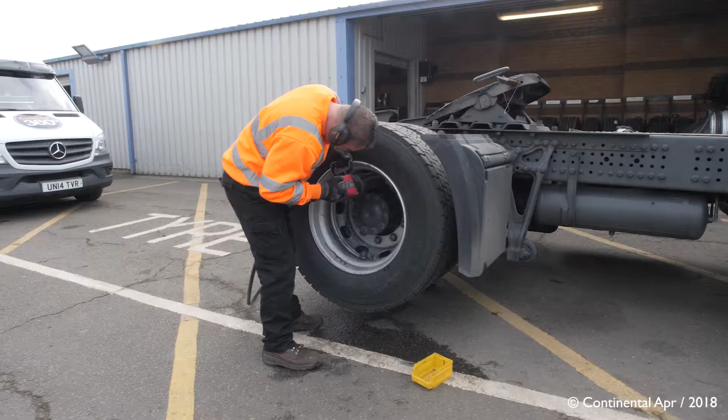What's more, if your vehicle does suffer from a detached wheel, your operator's licence could be at serious risk. That's why you need to stay on top of wheel fixing procedures and get it right each time, every time. During the course of this training video, we'll be showing you how to safely remove, service and remount a wheel on a truck, trailer, coach or bus.

And remember, if at any time during this training video there's something you don't understand, stop and ask your supervisor for further explanation, because you cannot have learning without understanding.

It's important to ensure that when a vehicle is booked in for a wheel removal, that everyone knows the correct procedures. That means parking it in a safe environment and above all else ensuring there's clear signage showing it's not to be taken out onto the road under any circumstance. It also means informing your site personnel in the traffic office and via the driver's notice board that the truck is not in service. When mounting or removing the wheel, be sure you follow all the standard working practices.

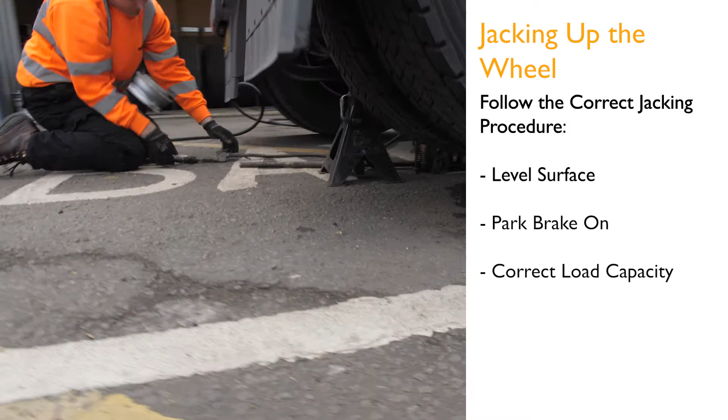For example, the initial lifting of the vehicle must be carried out using the correct jacking procedures. That means ensuring it's on a level hard standing surface with the park brake on and using a suitable jack with the correct load capacity. And if you've never removed or remounted a commercial vehicle wheel before, you must be properly trained to do it by a qualified tyre technician before starting the work.

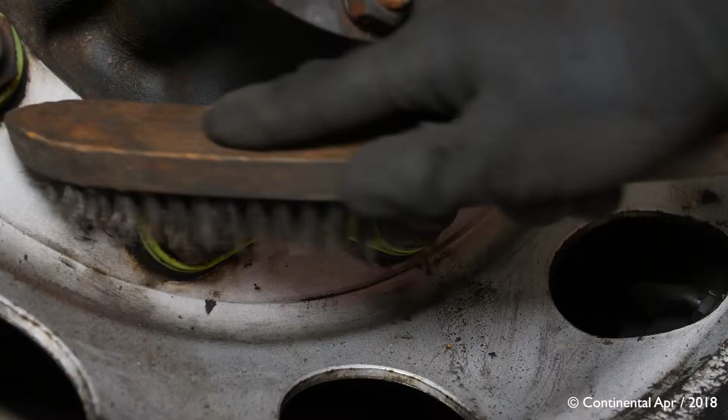First of all, before unbolting the wheel, make sure you clean the exposed threads of the studs with a wire brush or lightly lubricate them. Next, visually inspect the wheel assembly and check for any evidence that it may have been operating in a loose condition. If there are signs that a tyre has substantially deflated or has stood in a deflated condition for some time, the tyre or wheel components might have become damaged or displaced.

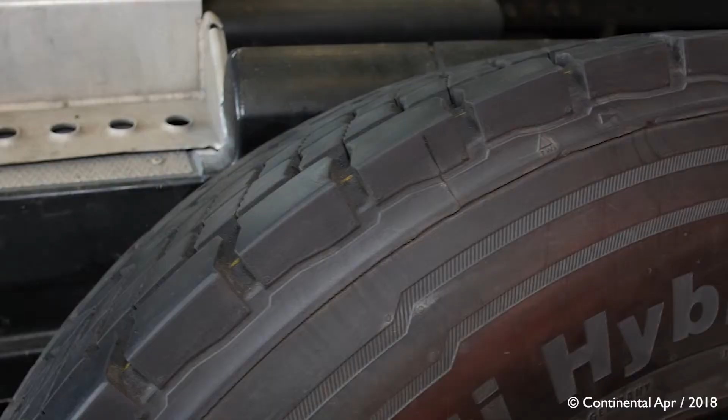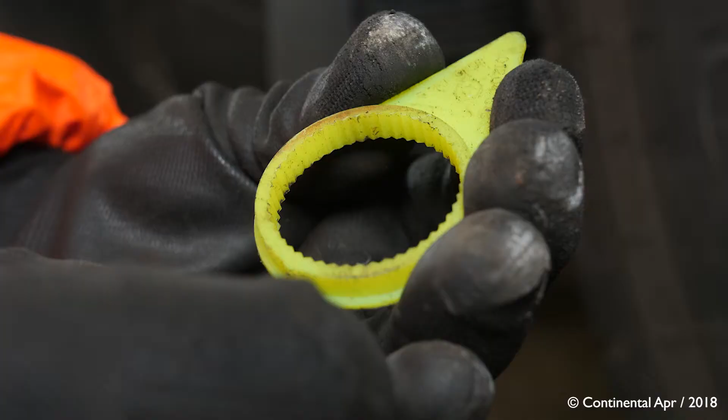If that's the case, remove the wheel assembly from the vehicle and the tyre from the wheel. Obviously, you'll need to examine the tyre to see why it's deflated and whether it's suitable for further service. And remember, each component part of the wheel must also be examined and replaced as necessary before being reassembled.

Now, in the case of aluminium alloy wheels, excessive heat from either a fire or a brake malfunction or a wheel bearing failure or a tyre failure or indeed any other cause could weaken the metal and render the wheel unserviceable. So if you do suspect an alloy wheel has been damaged by excessive heat, it must be removed from service immediately.

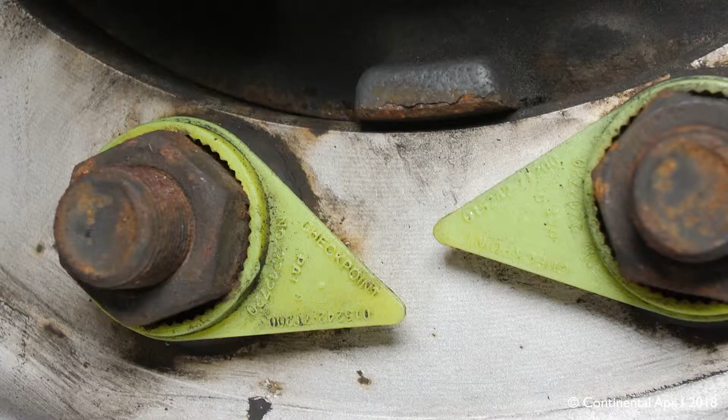Now it's time to make sure that any other loose debris around the wheel is removed, again using a wire brush. And if wheel nut indicators are fitted, check to make sure they're in the correct position. If they're pointing the wrong way, that could well be early signs of a potential defect, so you need to be vigilant for any abnormalities.

If the wheel is cracked or damaged, remember to deflate the tyre before attempting to remove the wheel. And should it be difficult to remove a wheel from the hub or drum, under no circumstances whatsoever, ever hit the wheel rim directly with a heavy hammer. To remove a wheel, you should always use the suitable tools designed for the job. And if those tools aren't available, a protective wooden block and a soft-faced mallet may be used, but only with caution.

Once the wheel has been lifted off the ground, unbolt the wheel nuts with the air gun, making sure to follow all standard working practices and keeping the wheel nuts in a safe and secure environment so you can inspect them later. If you do experience any excessive tightness or difficulty in removing the nuts, this could also indicate a potential wheel security issue.

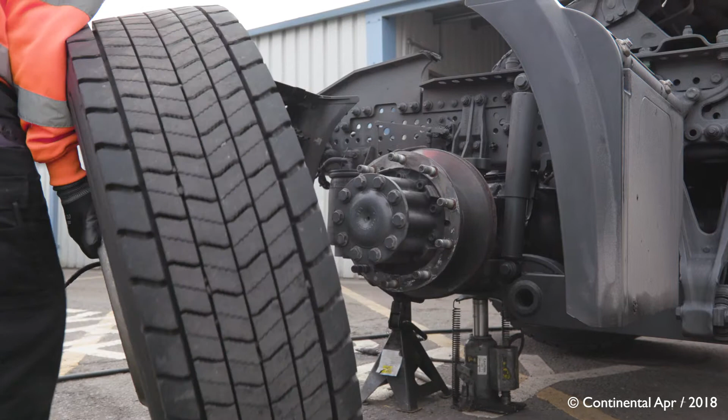Next, carefully remove the wheel from the hub assembly in line with manual handling procedures, taking extra care not to damage the stud threads on removing the wheel, whether it's a single or twin wheel assembly. So use levers or a cradle to lift and pull the wheels squarely off the hub. Finally, take the wheel away from the vehicle and fully deflate the tyre before carefully removing it from the wheel so it can be serviced and inspected.

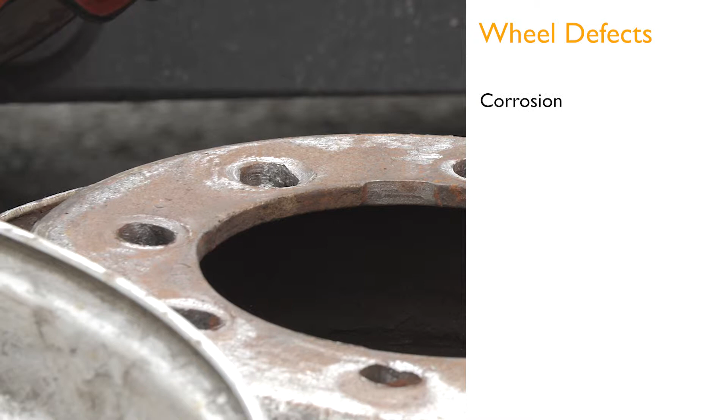Now that you've removed the wheel, you need to ensure it's safe and serviceable and that you've thoroughly checked it for any defects. And remember, any signs of damage or wheel deterioration, no matter how small, should be reported to the customer's maintenance supervisor. When inspecting the wheel, look for any signs of corrosion or pitting and remove any light rust with a wire brush.

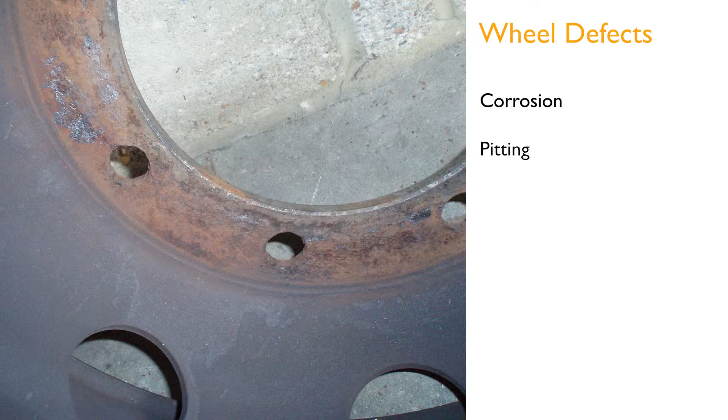If there's still any heavy pitting or corrosion after you've cleaned it, withdraw the wheel from service immediately and report it to the customer. Also, check for excessive wear around the centre bore of the wheel. Any significant wear in this area should also prompt the wheel's removal from service.

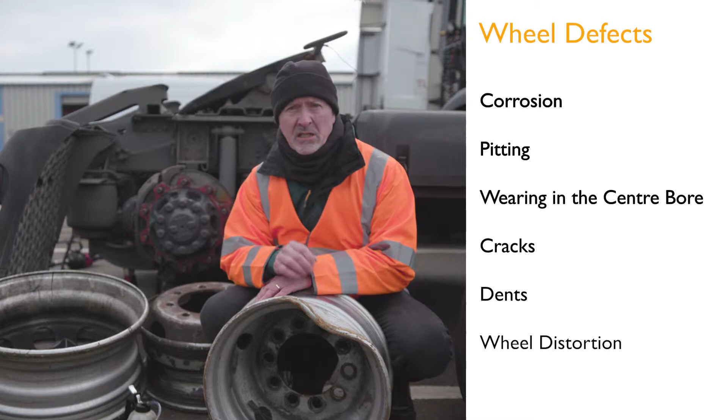And don't forget to closely inspect the wheel for any cracks or dents or wheel distortion too. And regardless of whether the damage is large or small, it won't be fit for further use in operation and the wheel should be taken out of service immediately. Once again, report this to the customer for further action.

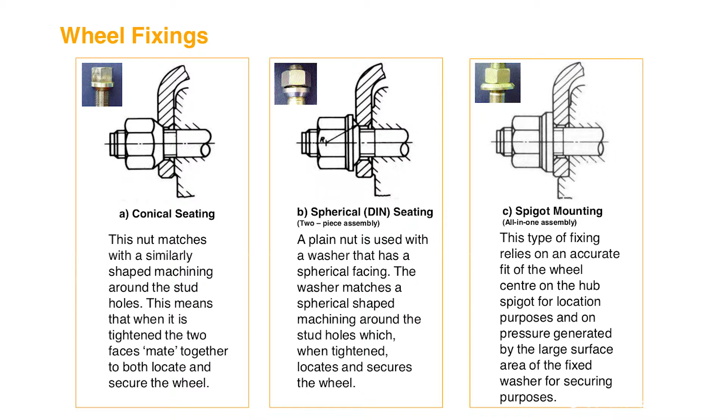However, if the wheel is undamaged and safe for operational use, a tyre can be refitted to it. But if you do find any defects, you must remove the wheel from service immediately and make sure it's not reused in any capacity whatsoever. Finally, remember that the replacement wheel should always be the same wheel fixing type as the original, and pay attention to any further customer specific policy that could be in place.

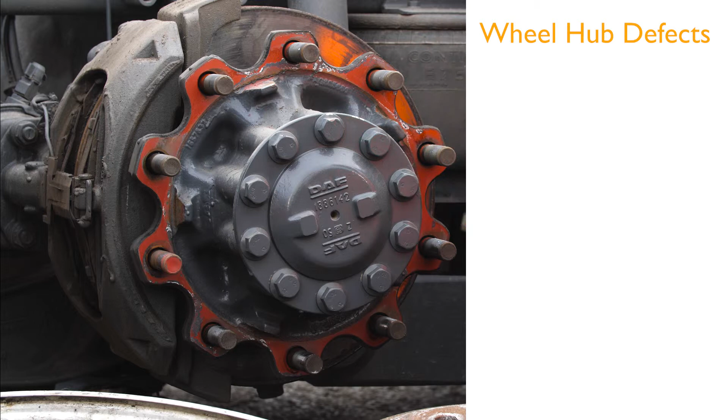Now that we know the wheel is operational, we can check the wheel hub. Firstly, inspect for any signs of worn spigots. This will be indicated by the wheel not centering correctly, which will cause an imbalance of the wheel, in turn vibration, resulting in loosening of the wheel itself. The spigots should also be free from debris, corrosion, or any damaging defects.

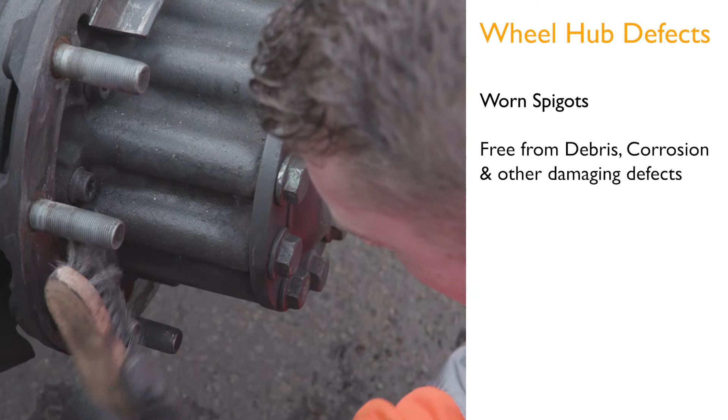Use a wire brush to remove the debris from all the areas of the wheel hub, but especially around the spigots and the mating faces, which should be spotlessly clean. If there is corrosion that can't be removed, or if there's any other damage, you must report it to the customer immediately and have the vehicle removed from service. If you're still not sure, contact the site, as it's better to have a vehicle parked up safely for further inspection than to have it involved in an avoidable accident out on the road.

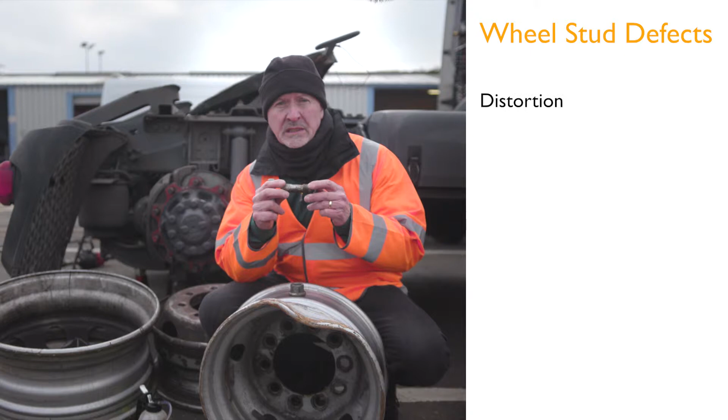You should now clean the wheel studs thoroughly and inspect them for any damage, for example, distortion, elongation, cracking or excessive wear to ensure they are reusable. And if they have been damaged, remove the vehicle from service and fit new wheel studs. Once again, make sure the customer knows that they're being replaced and that you've obtained a defect number.

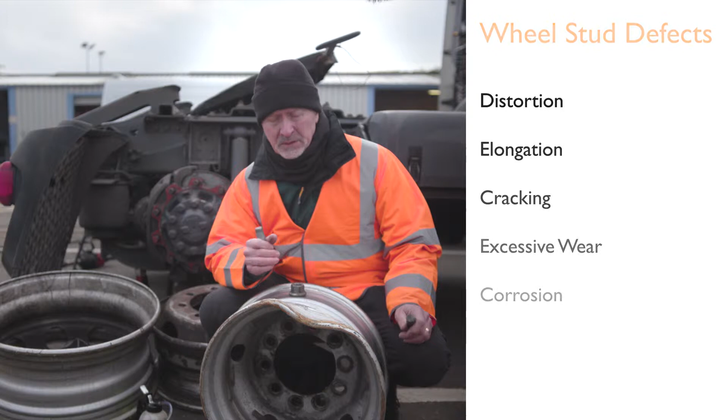Also, check the washer element of the nut. These need to be free moving and show no signs of cracks, corrosion or seizing. Also check the nut itself to ensure it's free from debris around the threads and that there are no signs of any damage. Remember, it's important that the nut should be able to move freely over the entire length of the stud when tightening by hand. And if you do need to replace the wheel nut, only use those that meet the original material specification.

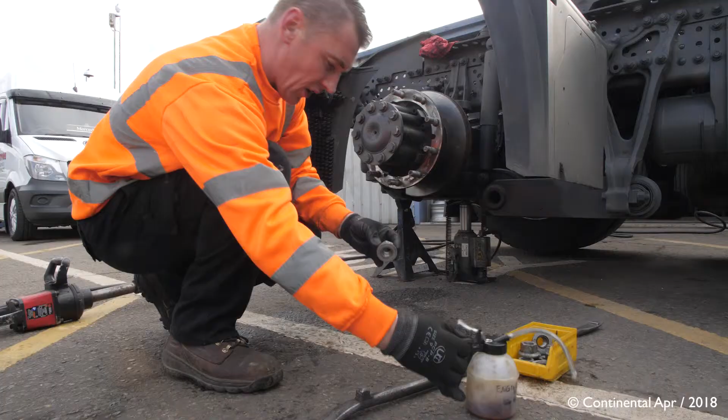If you find any of these defects on a wheel or its component parts, you must contact the fleet manager. More importantly, if you're ever unsure about a wheel's condition, contact a fleet manager, because it's better to act on a problem now than leave it to develop into something more serious later. Finally, if all the component parts have either been correctly serviced or replaced, you can now begin remounting the wheel back onto the hub.

Remember, before remounting the wheel assembly, ensure all the areas around the wheel and hub are thoroughly cleaned to ensure the mating faces on the wheel nave and the wheel hub are free from debris, as dirt or rust could end up between the mating surfaces and prevent sufficient clamping forces when the wheel nuts are tightened. Also, we need to make sure that the threads on the studs can reconnect.

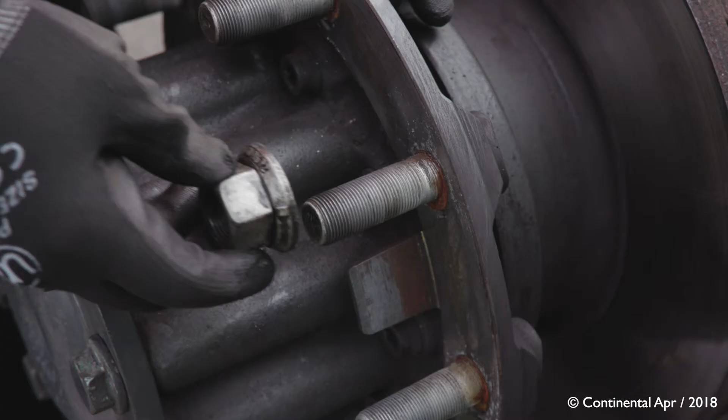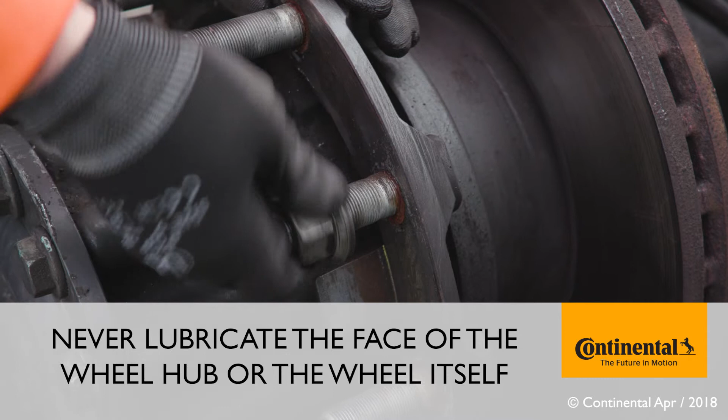To check this, apply a recommended amount of lubricant to the end of the threads on the studs and nuts, unless otherwise instructed by the vehicle manufacturer, whilst making sure you don't lubricate the face of the hub or the wheel. In other words, lubrication should only be applied to the nuts and the studs. Once again, if any components are found to be damaged or unserviceable, replace them accordingly and obtain a defect number.

Now, carefully refit the wheel to the hub, taking care not to damage the wheel studs and threads, and making sure the valve access is aligned if twin wheels are fitted. Make sure also that you follow all standard working practices when doing this.

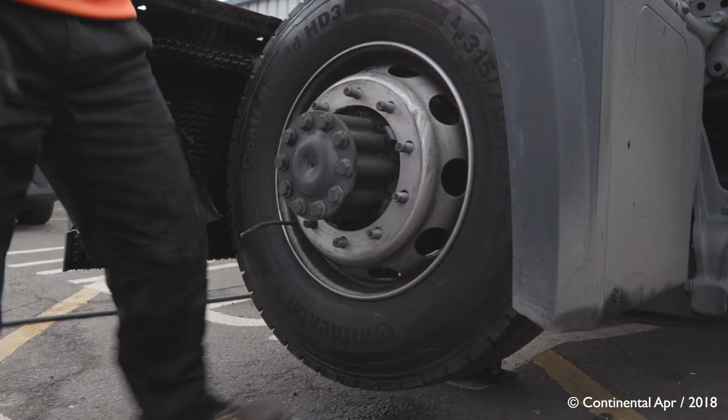Refit the wheel nuts manually over the full length of the stud, and if any excessive tightness is encountered during this process, then the stud and nut must be considered unserviceable and they should be replaced. And if an air tool is used, it's advisory to have it at the lowest setting. Above all else, never use an air tool for the final tightening.

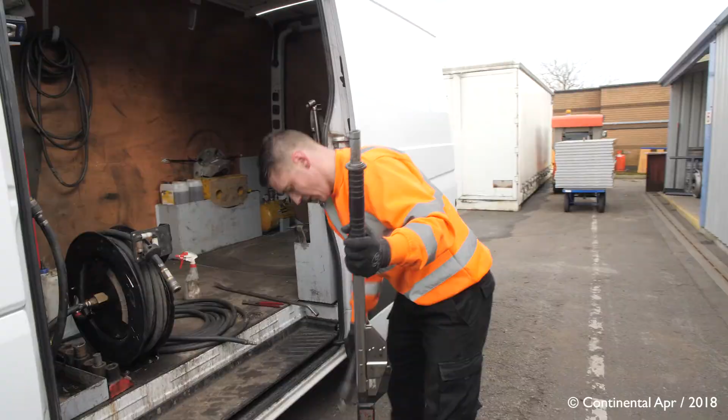Once the wheel assembly has been remounted on the hub and ensuring there's no damage to the studs, either hand turn the nuts onto the studs or use an appropriate wheel brace. And once the wheel assembly is secured on the hub, torque the nuts using a properly calibrated torque wrench, tightening the wheel nuts in the correct sequence. This tightening should occur before you lower the vehicle back to the ground. And remember, never be tempted to over-tighten as this will stretch the stud.

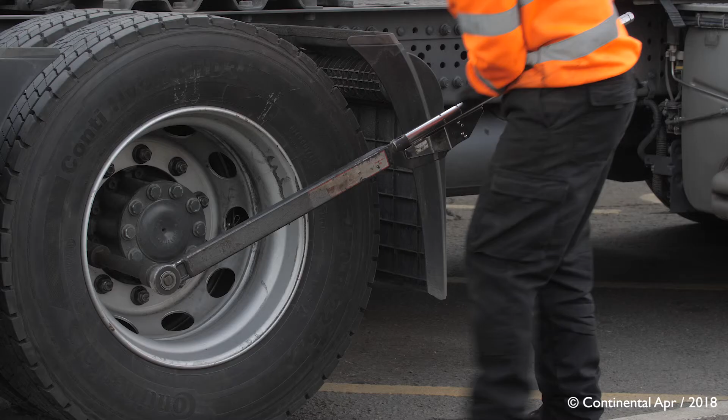On HGVs, after the initial wheel tightening has been completed, it's possible there could be what's called settlement in the studs. That's a relaxation of the clamping forces on the wheel. Therefore, it's vital that you repeat the torquing procedure after leaving the vehicle to stand for at least 30 minutes or after it's travelled for a distance of between 40 to 80 kilometres, 25 to 50 miles.

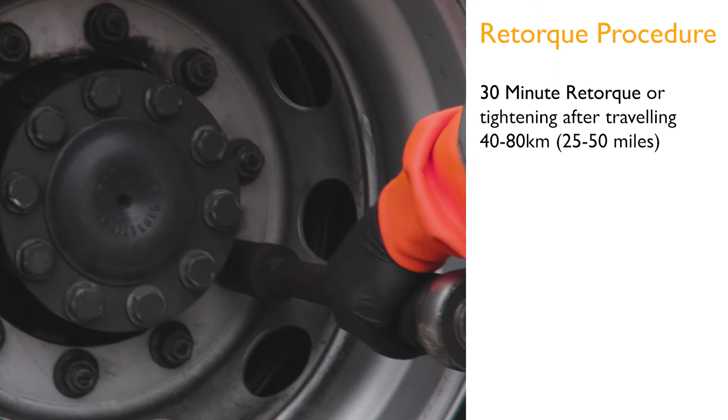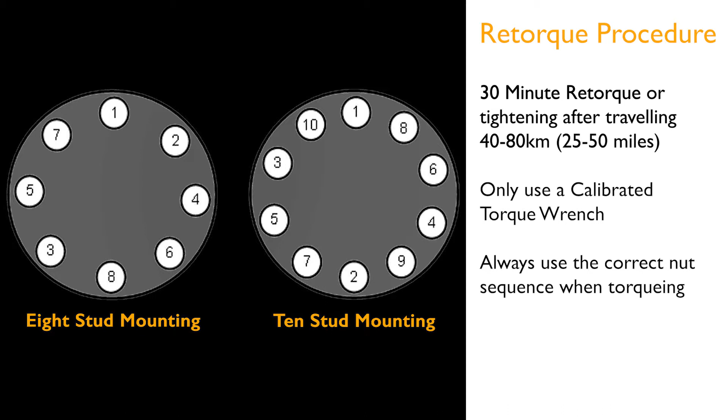Again, only use your calibrated torque wrench and not extensions or wheel nut spanners and spiders. And again, the correct nut sequence must also be applied. But above all else, under no circumstances whatsoever should wheel nuts be slackened off and then retightened during the retorque process. Finally, after retorquing has been completed, refit the wheel nut indicators if required, making sure they point to the correct position.

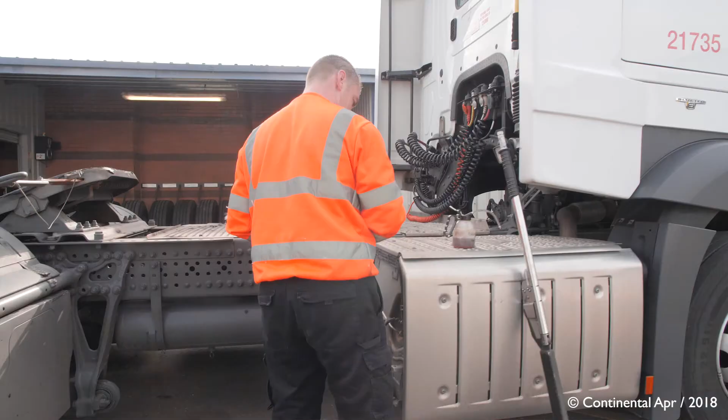Then it's time to return all your equipment to storage, reduce the torque wrench setting to 0, and finally, remove any working signage, complete the appropriate paperwork, and make sure that appropriate copies are given to the relevant parties. The truck is now operational once more and it's safe to go back on the road. But always remember, routine in-service checks should take place afterwards and all wheel fixings rechecked for tightness in accordance with the operator's and the vehicle manufacturer's preventive maintenance schedule.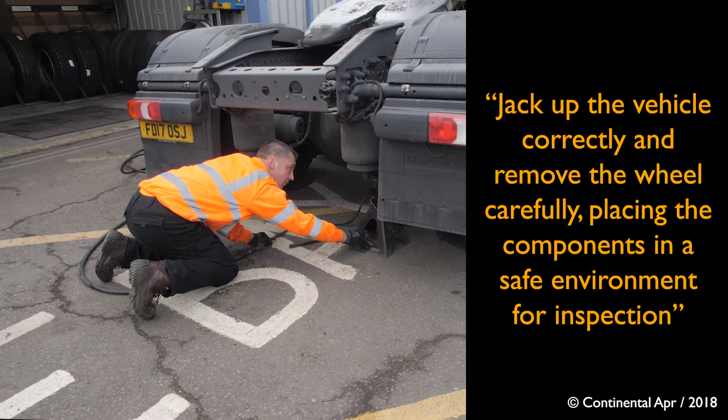So there you have it, the complete process of removing, inspecting, servicing and refitting a wheel. And now you have the knowledge to make sure the vehicles you service are not only safe for those driving them, but also for those sharing the road with them. And to finish, here are some of the key points to remember. Jack up the vehicle correctly and carefully, and remove the wheel from the wheel hub, placing all the nuts and studs in a safe environment so you can inspect them later.

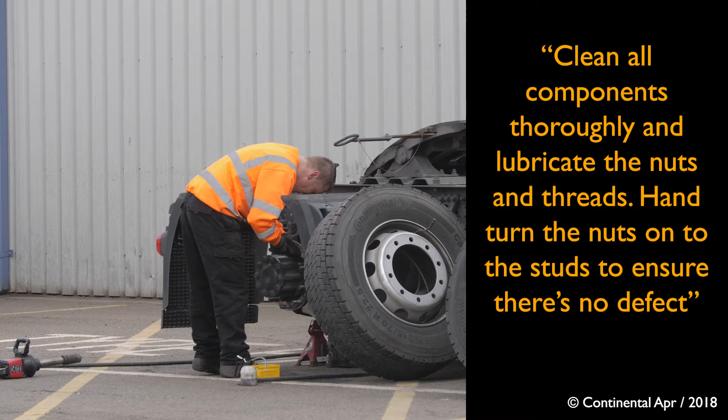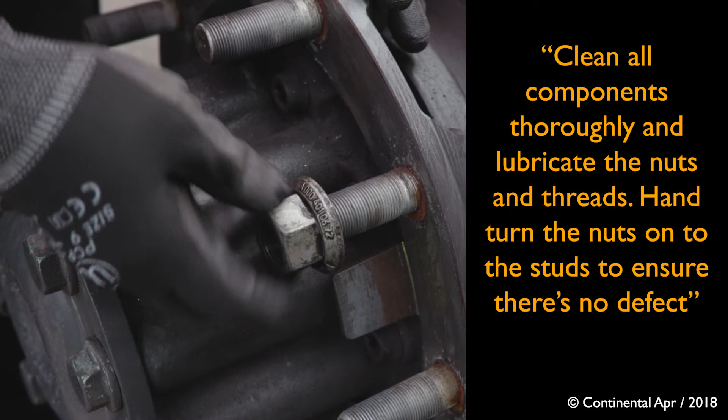Remove the tyre from the wheel, making sure to follow all standard working practices and check for any defects, corrosion, cracks, dents or anything else you find of concern. And if you do find any defect, take the wheel out of service immediately. Clean all the parts thoroughly to remove any loose debris and lubricate the nuts and threads. Make sure the wheel nuts are usable by twisting them onto the wheel fixture by hand until you see the top of the head. However, make sure you check your customer's policy as it may vary. Make sure you don't lubricate the wheel hub face or any other parts of the wheel.

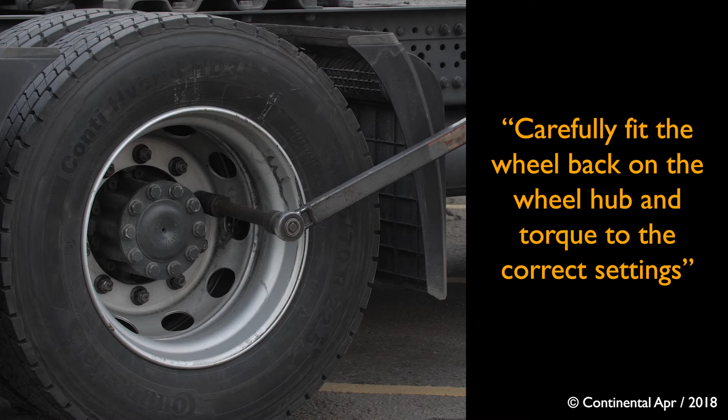Fit the wheel back onto the wheel hub, carefully following all standard working practices, and torque the wheel nuts to the correct setting. Then, lower the vehicle and let it stand for at least 30 minutes, or after it's travelled a distance between 40 and 80 kilometres, 25 to 50 miles, before retorquing. This will ensure the clamping forces are properly maintained. Finally, if you're ever unsure about anything regarding wheel fittings and fixings, contact the fleet manager or a qualified tyre technician and talk things through. It's always better to be certain than unsure.